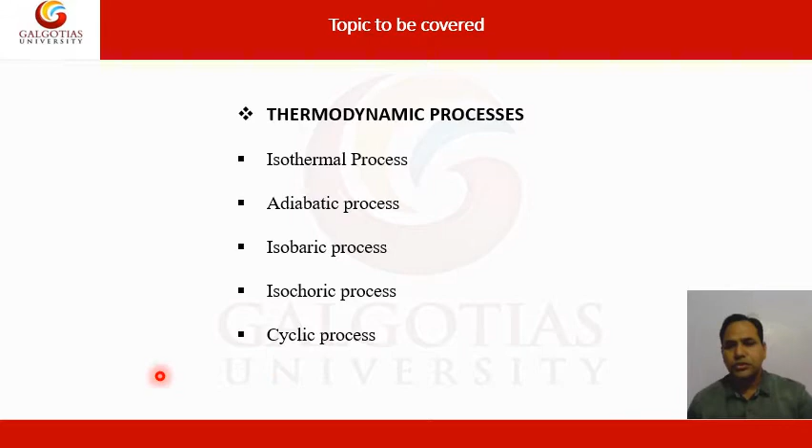Now move to the next slide. So topics to be covered. Here showing the thermodynamic processes to be covered: first one is isothermal process, and adiabatic process, isobaric process, isochoric process and cyclic process. So these topics will be covered in the coming slides.

First one is isothermal process, another one is adiabatic process, the third one is isobaric process, and isochoric process and cyclic process. So just see that isothermal means the temperature is constant, adiabatic is heat is constant, isobaric is pressure is constant, and isochoric is showing the volume is constant. So now move to the next slide.

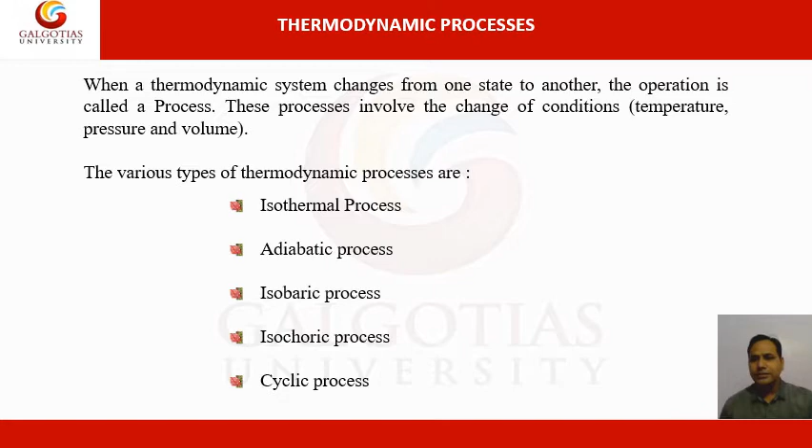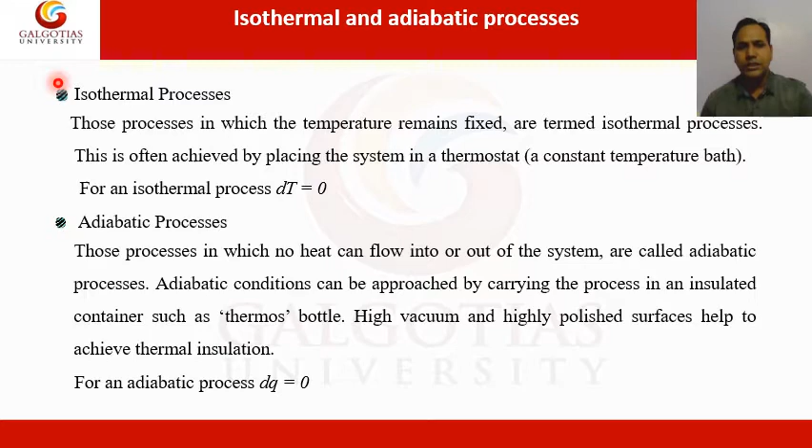Another process is adiabatic process. Those processes in which no heat can flow into or out of the system are called adiabatic processes. Adiabatic condition can be approached by carrying out the process in an insulated container such as a thermos bottle. High vacuum and highly polished surfaces help to achieve thermal insulation. For the adiabatic process, the equation is del Q is equal to 0. So here showing the two types of process: isothermal process and adiabatic process.

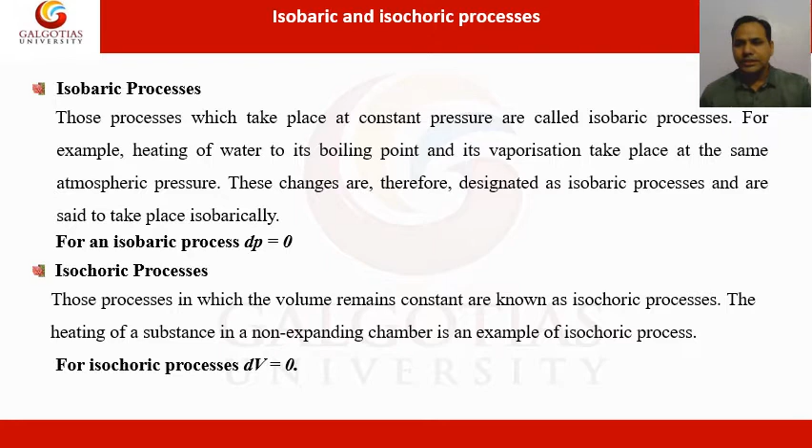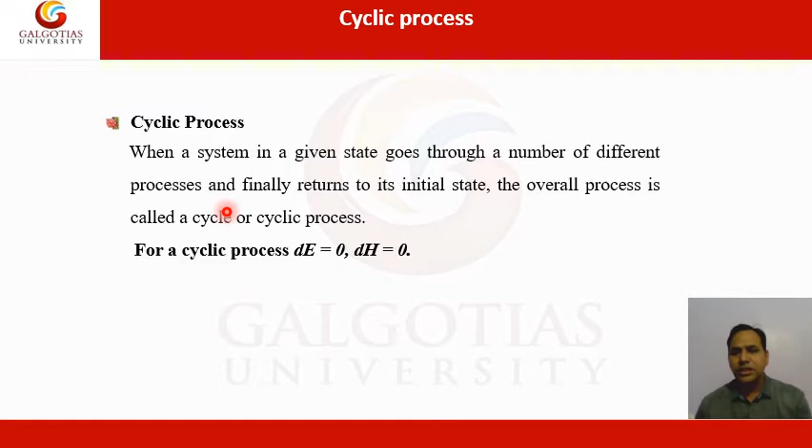Another process is cyclic process. In a cyclic process, a system in a given state goes through a number of different processes and finally returns to its initial state. The overall process is called a cyclic process. For the cyclic process, del E is equal to 0 and del H is equal to 0. So the change in internal energy and enthalpy is 0, since the initial and final states of the system are the same. So a cyclic process is one where the system's state goes through a number of different processes and finally returns to the initial state.

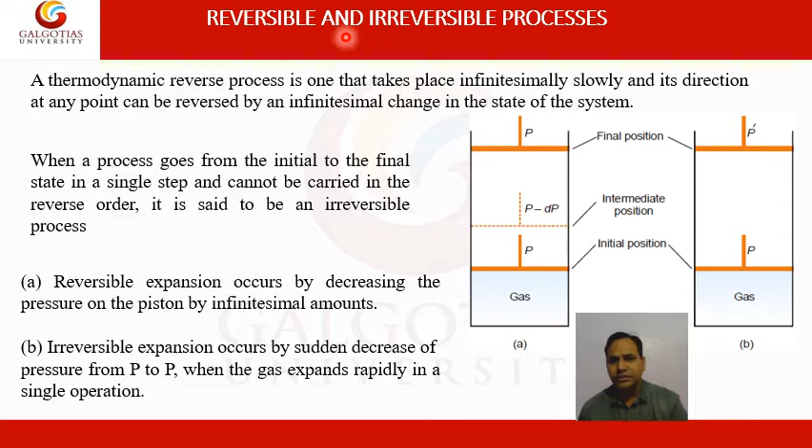A reversible expansion occurs by decreasing the pressure on the piston by an infinitesimal amount, means a small amount. The irreversible expansion occurs by a sudden decrease of pressure from P to P dash, when the gas expands rapidly in a single operation. Here showing the diagram: the initial position of the piston, the intermediate position and the final position. A showing the reversible expansion and B showing the irreversible expansion. So this is reversible and irreversible process.

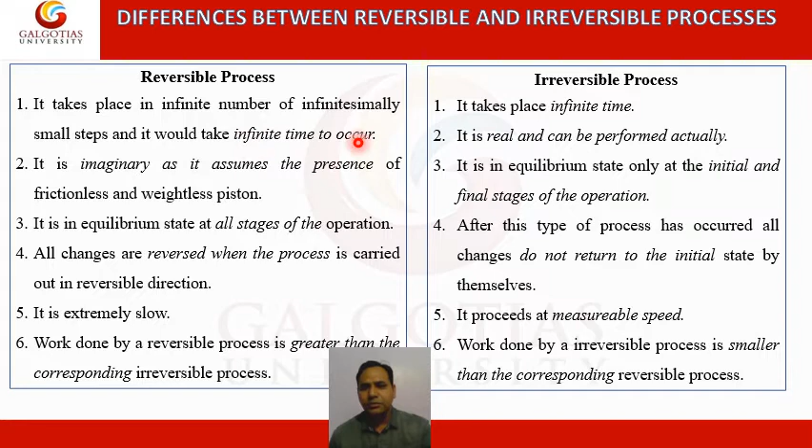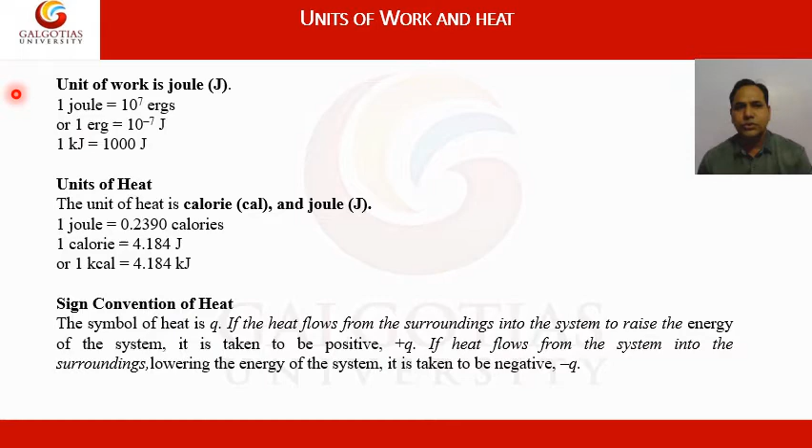So here showing a solved example problem. Calculate the pressure volume work done when a system containing a gas expands from 1 liter to 2 liter against a constant external pressure of 10 atmospheres. Express the answer in calorie and joule.

So putting the values in this equation, W is equal to minus P external into V2 minus V1. The pressure is 10 and putting the volume values 2 and 1. So W is minus 10 liter atmosphere. After calculating, we find this value in calorie and joule. These types of numerical problems will be asked in examinations.

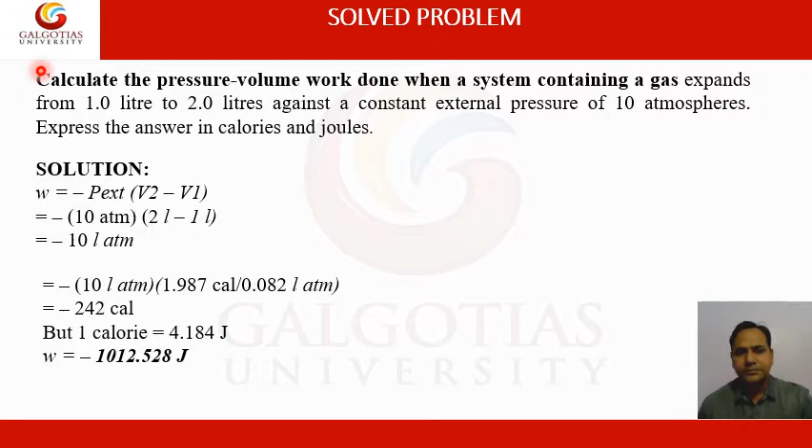Here showing the isothermal reversible expansion work on an ideal gas. The reversible expansion of gas takes place in an infinite number of infinitesimally small intermediate steps. To start with, the external pressure P is arranged equal to the internal pressure of gas P gas, and the piston remains stationary. If P external is decreased by an infinitesimal amount, that is dP, the gas expands reversibly and the piston moves through a distance, that is dl.

So this diagram shows the piston movement, that is dl, and the initial and final pressures, P gas and P external, showing a single intermediate step, the initial position and the ideal gas. So dP is a small amount, so for all practical purposes P external is equal to P gas is equal to P.

So the work done by the gas in one infinitesimal step, dW, can be expressed as dW = P A into dl. A is the cross section area, so overall dW is P into dV. dV is the increase in volume, so the total amount of work done in the isothermal reversible expansion of ideal gas from V1 to V2 is found by solving with the ideal gas equation. This equation will help for the calculation of numericals.

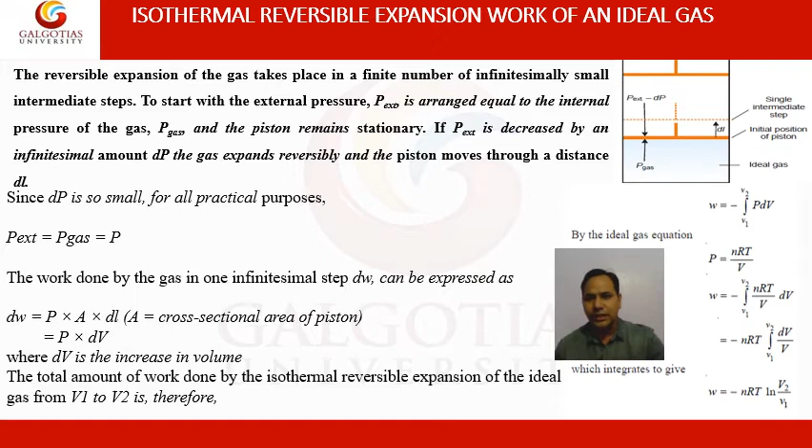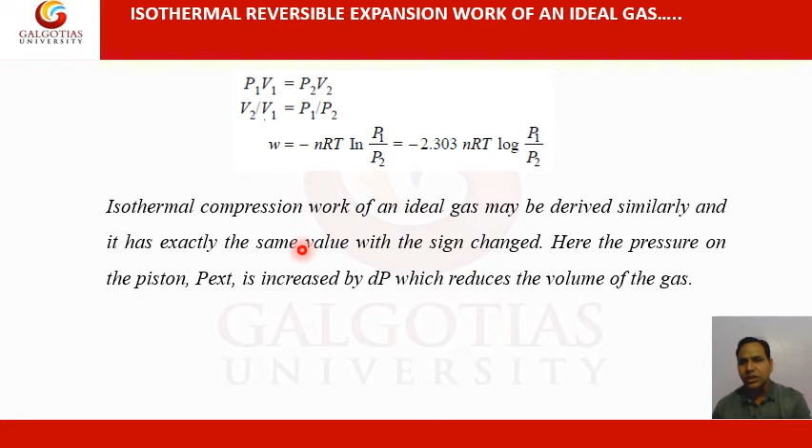This equation: P1 V1 is equal to P2 V2. Solving this equation, the W now changes value: W = -2.303 nRT log P1/P2. So the isothermal compression work of an ideal gas may be derived similarly, and it has exactly the same value with the sign changed. Here the pressure on the piston, P external, is increased by dP, which reduces the volume of the gas. So this is isothermal reversible expansion of an ideal gas.

Here we show isothermal irreversible expansion work of an ideal gas. Suppose we have an ideal gas contained in a cylinder with a piston. This time the expansion of the gas is performed irreversibly, that is, by instantaneously dropping the external pressure P ext to the final pressure P2. So the work done by the system is now against the pressure P2 throughout the whole expansion, and is given by the following expression, this equation.

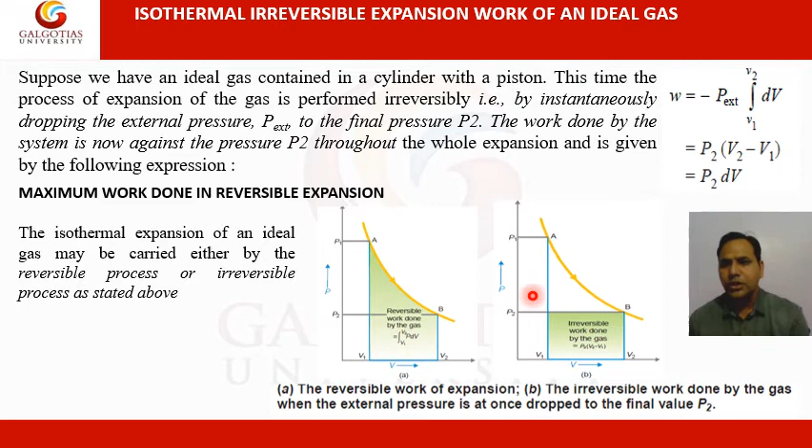Maximum work done in reversible expansion: here we show the two types of process, the reversible work of expansion and the irreversible work done by the gas when the external pressure is at once dropped to the final value P2. So the isothermal expansion of an ideal gas may be carried out either by a reversible process or an irreversible process. Here is the reversible process and this is the irreversible process. Now come to the next slide.

Here is the maximum work done in reversible expansion. The reversible expansion is shown in the figure, in which the pressure decreases as the volume increases. The reversible work done by the gas is given by the expression -W reversible = integral from V1 to V2 of P dV, which is represented by the shaded area shown here. If the expansion is performed irreversibly by suddenly reducing the external pressure to the final pressure P2, the irreversible work is given by -W irreversible = P2 (V2 - V1), which is shown by the shaded area.

Thus mechanical work is not a state function, as it depends on the path by which the process is performed rather than on the initial and final state. So it's a path function. The work done in a reversible expansion of a gas is the maximum work that can be done by a system expanding between the same initial state A and final state B. The work always depends on the external pressure P external. The larger the external pressure, the more work is done by the gas.

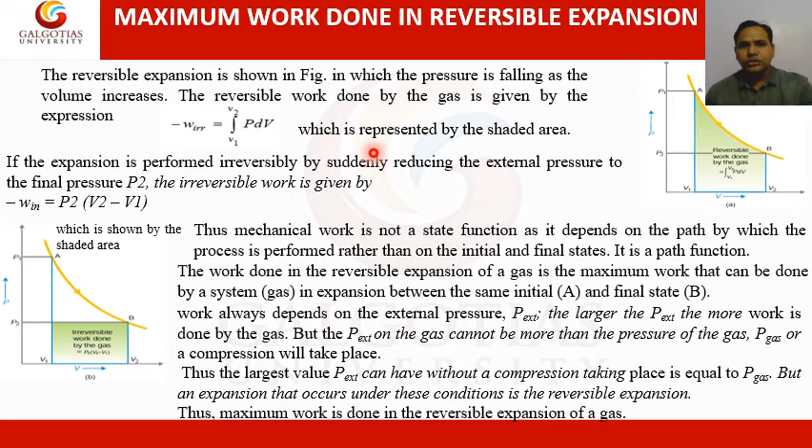Here is a solved example. 1 mole of an ideal gas at 25 degrees centigrade is allowed to expand reversibly at constant temperature from a volume of 10 to 20 liters. Calculate the work done by the gas in joules and calories. Putting the values in this equation, we find the solution is -410.46 calories. So using this equation, you solve this problem.

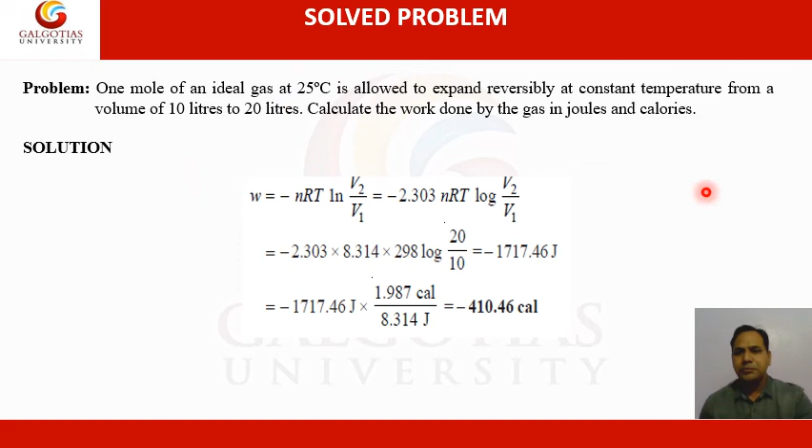The summary of this presentation is that there are different types of thermodynamic processes: isothermal, adiabatic, isobaric, isochoric and cyclic processes. In an isothermal process the temperature remains the same; in an adiabatic process the heat remains constant; isobaric, bar means pressure, so pressure remains constant; in an isochoric process the volume remains constant; and in a cyclic process the initial and final states of the process are the same. These are the different types of thermodynamic processes I have discussed in this presentation.